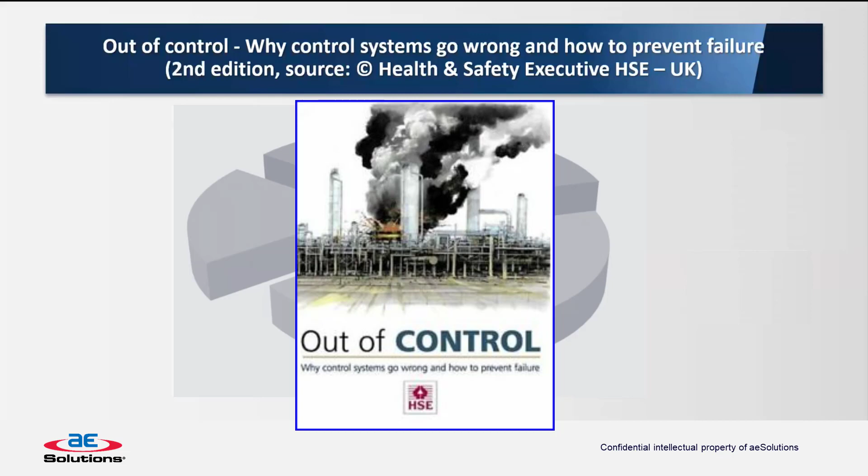Is that really why control systems go wrong? Okay. Out of Control: Why Control Systems Go Wrong and How to Prevent Failure. That's a publication of the United Kingdom's Health and Safety Executive. It is very well known in the functional safety business. And I have used this chart in multiple presentations over the years.

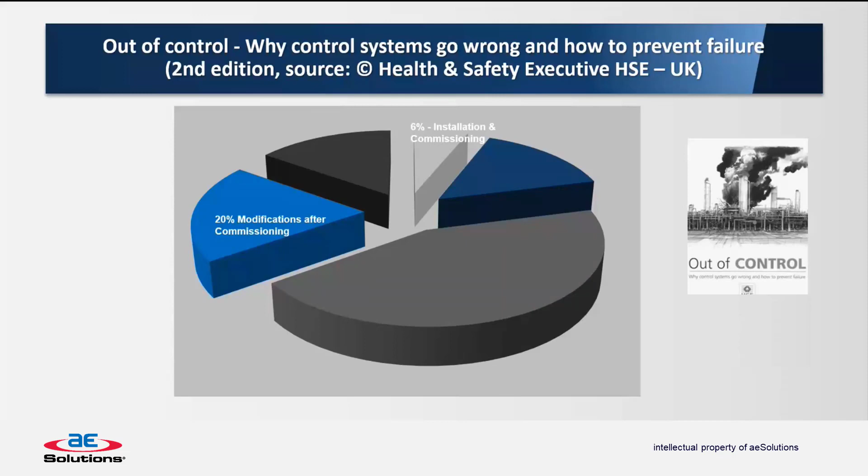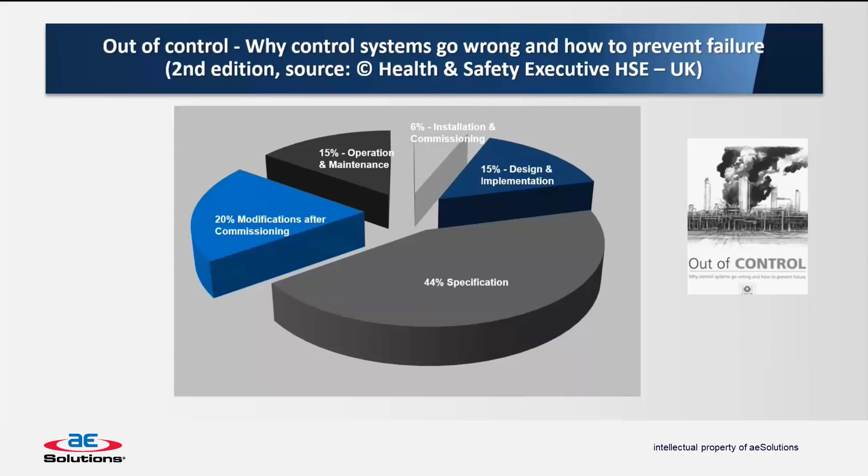And what it represents is the percent of a particular phase of the life cycle where things went wrong that resulted eventually in a serious incident. 6% installation and commissioning, 20% modifications after commissioning, 15% operation and maintenance, 15% design and implementation, and this is the biggie that was a surprise to a lot of people when it was published, that where we were going wrong with process safety and related to instrumented protective functions was in specification.

So if you take that pie chart, you can do the same thing against the safety life cycle: specification, design and implementation, and then you can break it down a little bit more to show the areas that we're interested in: hazard and risk analyses, then SIF selection, safety instrumented function, and safety integrity level determination. The SISFEL is what we used to and still do call the group that I am in. And then device selection, safety integrity level calculation. Again, that's a SISFEL function.

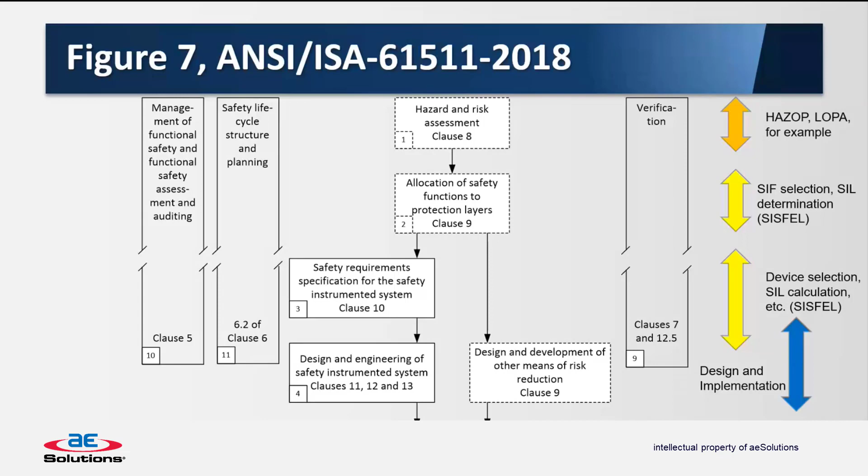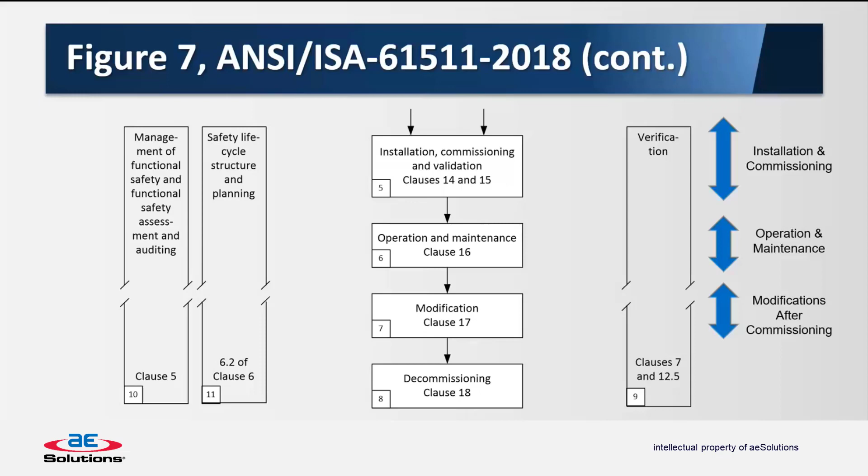And then, not to cut off half the life cycle, installation and commissioning, operation and maintenance, modification. I think if you had taken a survey of people before the HSE publication came out, this is where people would have said most of the incidents were caused. And I'll have a little bit more to say about that later in the talk.

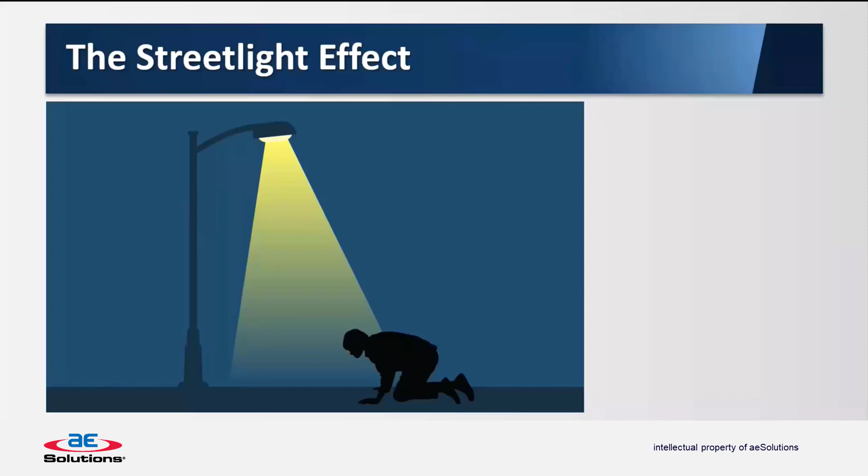What really prompted me to want to do some of the research that led to this talk was what is known as the Streetlight Effect. You may be familiar with this little story of someone on their hands and knees, obviously looking for something. Along comes a police officer, asks the person what they are doing. And they say they're looking for the car keys that they dropped. Well, the officer wants to help, so he asks, where were you standing exactly when you dropped them? And the person replies, back up the street. Then why are you looking here? Because the light is better.

Are we looking at the specification, not to the exclusion, but giving it more effort than we should? Because that's our business. That's what's right in, at least, my part of the business. What's right in front of me on my desk or on my computer screen is the SISFEL portions of the safety life cycle that I just identified. So that's the Streetlight Effect.

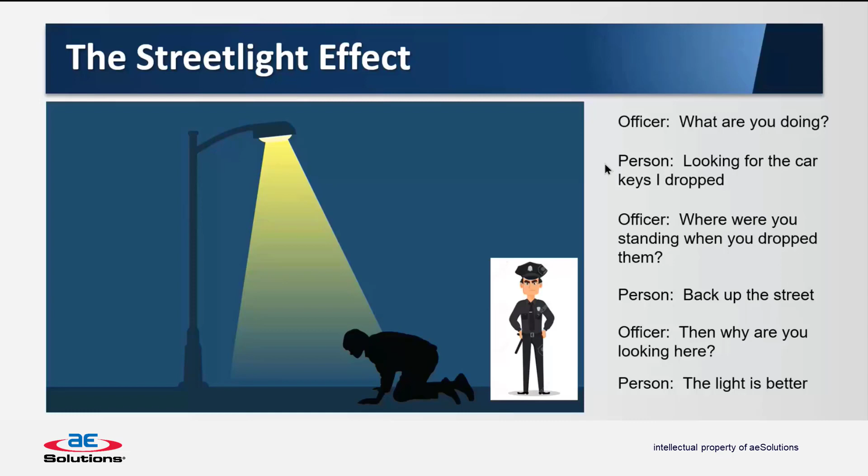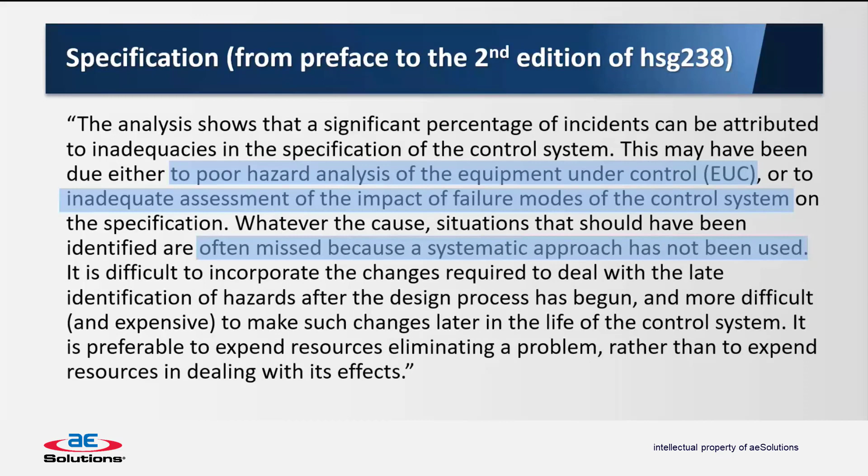When I was putting this talk together, I said, well, I'm familiar with the identification of the different incidents in the report, where they identified that specification is where they went wrong. But I said, well, I probably ought to go ahead and really read the report. And if I read the report, it is not as exclusive to the analysis of the various phases as I was assuming. They do say poor hazard analysis of the equipment under control, inadequate assessment, systematic approach not used. These are all portions of the specification phase that when you lump everything together as specification, that's where I started to get worried if we were looking where the light was better.

So this is the table from that report, where 44% of the incidents they reviewed were due to inadequate specification. And they said of those, 12% were inadequate functional requirement specification, and 32% were inadequate safety integrity requirement specification.

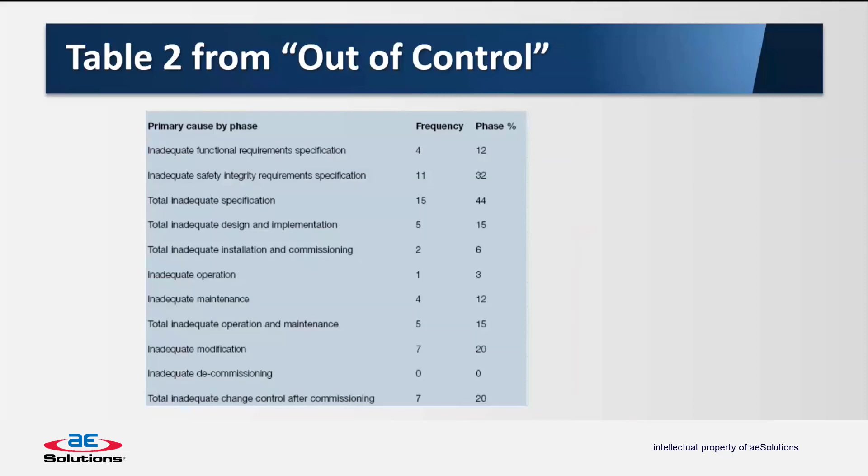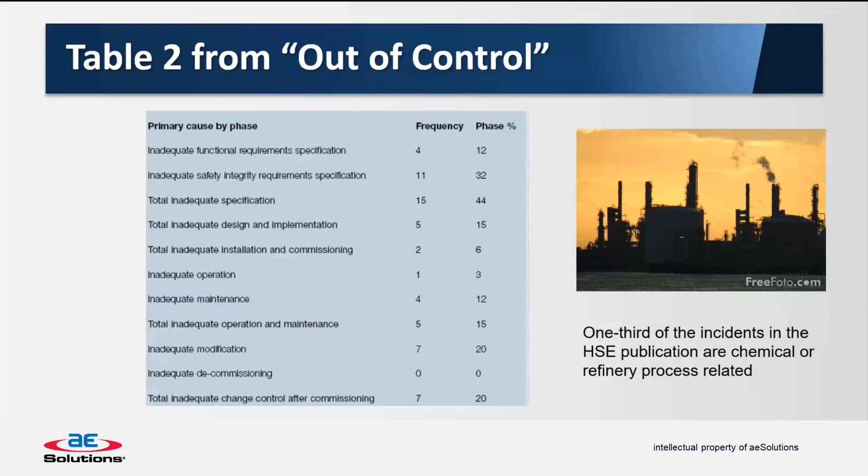But the granularity of the causes in these compilations is somewhat limited. In other words, just because a significant incident happened, very few cases do the reports, particularly the summary reports that you can find on multiple incidents, rarely do they give you the detail that you would need to say, was this specification related or not?

Most of the major incidents involve a sequence of events. They have multiple causes related to organizations and other things. And they generate these large reports. And again, you may find something that says, well, specification of this control or safety function was inadequate. That's almost never the entire story.

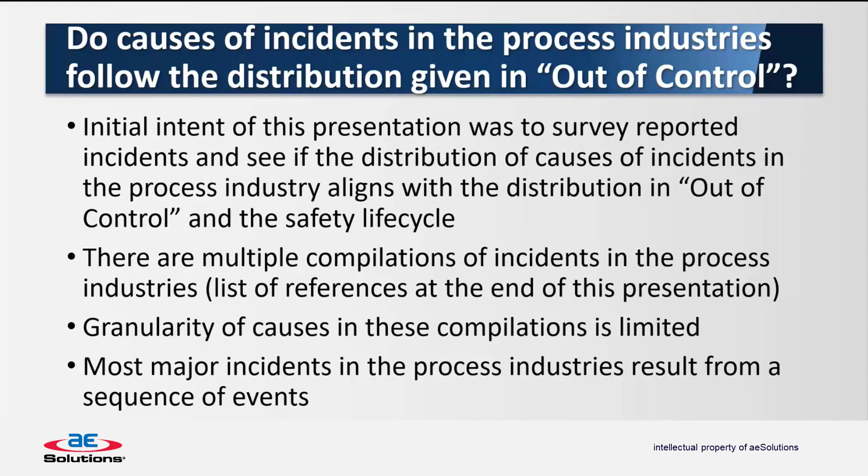So I did go through several of the reference lists, and I did look at 50 incidents in a particular period of time out of Loss Prevention in the Process Industries, which is a commonly cited book. And I was only able to identify 5 that were in the least bit instrument related based on the description that was given. And again, can you say from this, were these specification related? Possibly. There's just not enough detail to tell.

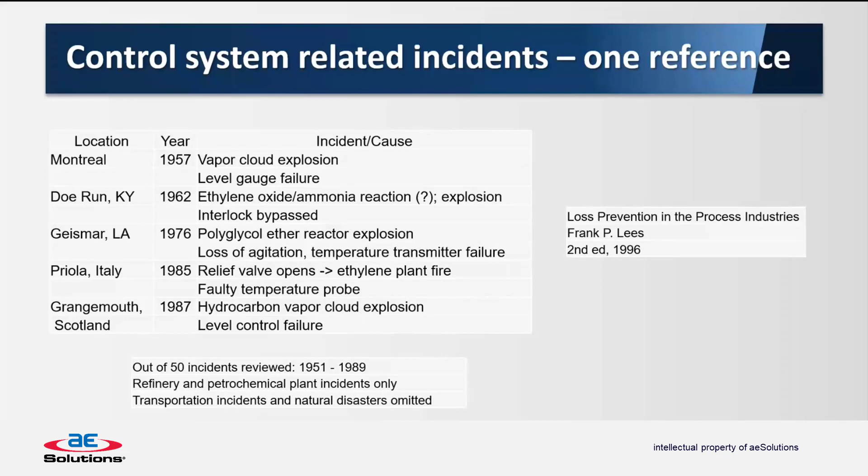Essentially it was a tank overflowed in a fuel depot outside of London and generated a vapor cloud that eventually exploded. And reading the reports on the incident, if this was the consequence, did they not recognize the potential consequence of overfilling a tank? Would it not have made sense to have multiple independent, diverse technology level instruments and communication to the remote control center? So I would have to say, of the major incidents that most people are familiar with, Buncefield becomes the closest to being specification related.

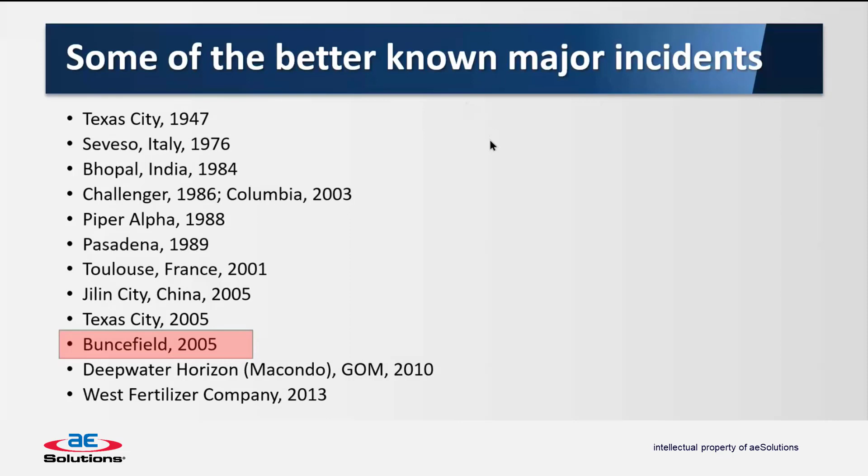So where can things go wrong in specifications? Well, obviously in the hazard assessment: if you don't identify a hazard, if you don't identify an initiating event, if you don't accurately predict the potential consequence, if you give too much credit for your existing safeguards, then you have missed something that will not be addressed in the rest of your project.

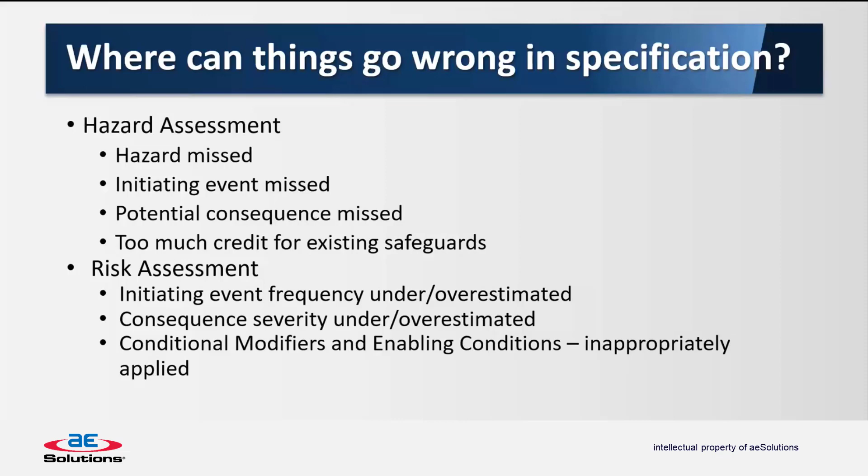Risk assessment: people tend to overestimate or underestimate initiating event frequency. We happen to be involved in a project right now where we're actually doing some failure mode and effect analysis, trying to apply some Bayesian statistics to help a client identify an initiating event frequency closer to the true value than what you can get just out of looking at the reference books. Obviously, you can underestimate the consequence severity. Conditional modifiers and enabling conditions can be inappropriately applied to reduce the potential frequency.

I borrowed this chart from the presentation I did a while back on functional safety assessments. It's not really a serious analysis, but one thing we run into frequently when people ask us to help them do safety integrity level determination of safety functions related to fired equipment is that they start out assuming that if the slightest bit of uncombusted fuel makes its way into the firebox, then you have a violent explosion that results in a fatality. And that makes an awful lot of assumptions.

So this just happens to be a specific instance that I've seen several times, and people come up with what seem unnecessarily high safety integrity level requirements beyond that required by the standards to address this, when if they took a more hard-headed look at it, it would not necessarily occur with the frequency or the consequence that they assume.

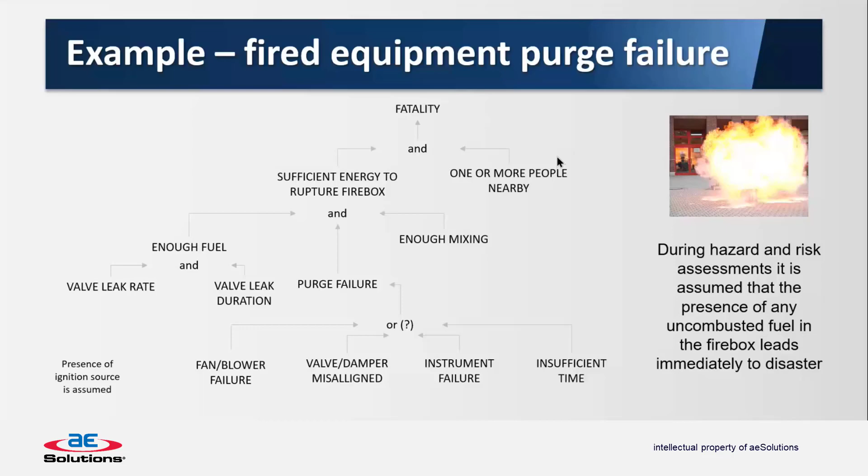In the safety requirements specification, systematic errors. Are your field devices going to be certified to IEC 61508 or based on prior use? The standard is more forgiving of you if you base them on prior use. However, this is also some place where you can go astray, I should say, because the latest version of ANSI ISA 61511 allows you to have a safety integrity level 2 function with 0 hardware fault tolerance. In other words, no redundancy.

Well, that is based on the fact that the failure rates you're using to calculate the safety integrity level are based on prior use, but the standard doesn't state that very clearly. And that's an unfortunate weakness, I think, in the standard, but it's a place where you have to be careful. It makes a difference in how you evaluate hardware fault tolerance, architectural constraints, whether you're basing your failure rates: are they certified devices, or are they based on prior use?

Is your failure rate data reasonable? Boy, that's something that we deal with very frequently. Clients will come to us sometimes with a manufacturer's certificate that has a dangerous undetected failure rate for a device that's 1 or 2 orders of magnitude lower than what we're used to seeing even for certified devices. And sometimes it can be difficult to get the client to recognize the risk that they're taking.

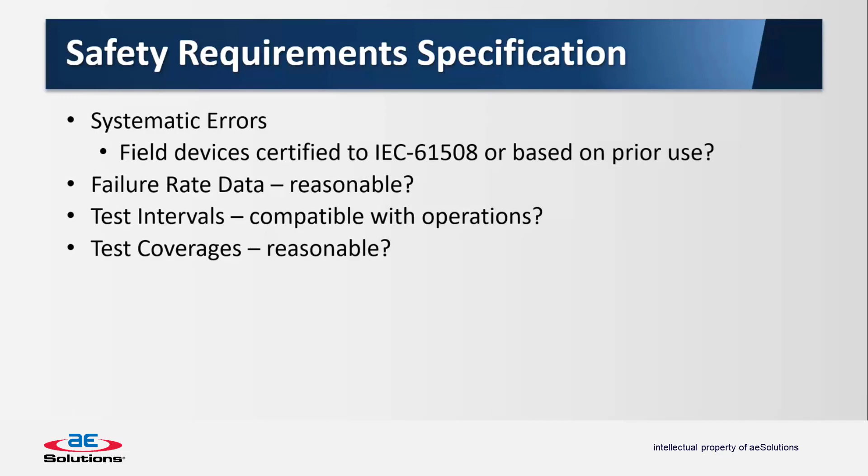Test coverages, that's another place where people want to say, oh, our test coverage, we cover 99% of the potential failures. Well, if you look at hopefully the manufacturer's safety manual, that's possibly not reasonable. We had a good presentation some time ago by a vendor talking about the work that has been done in the nuclear industry about what it takes to obtain proof test coverage for shutoff valves. To get to the highest proof test coverage takes an awful lot of work and an awful lot of resources, hardware resources.

Process safety time, is it accurate? Is it considered in the design? Do the valves really close fast enough? All process operating modes considered. Do you consider startup and shutdown? Are there times when one piece of equipment is out of service but not another? Will tripping this safety function at that time create a hazard you hadn't anticipated?

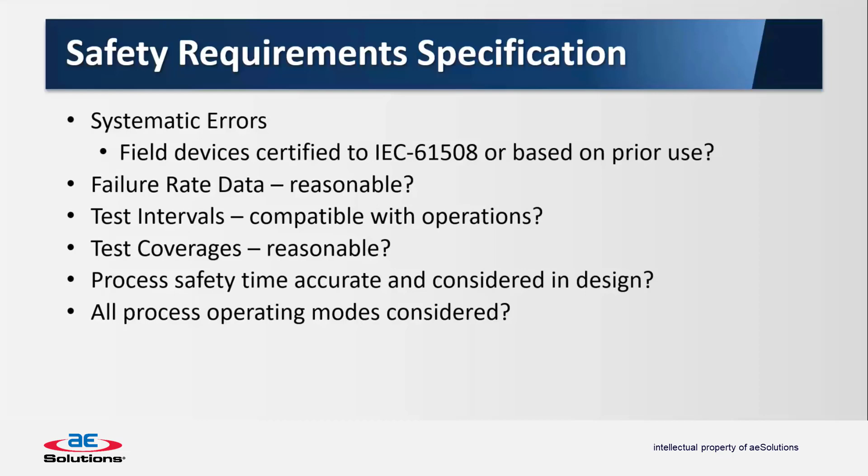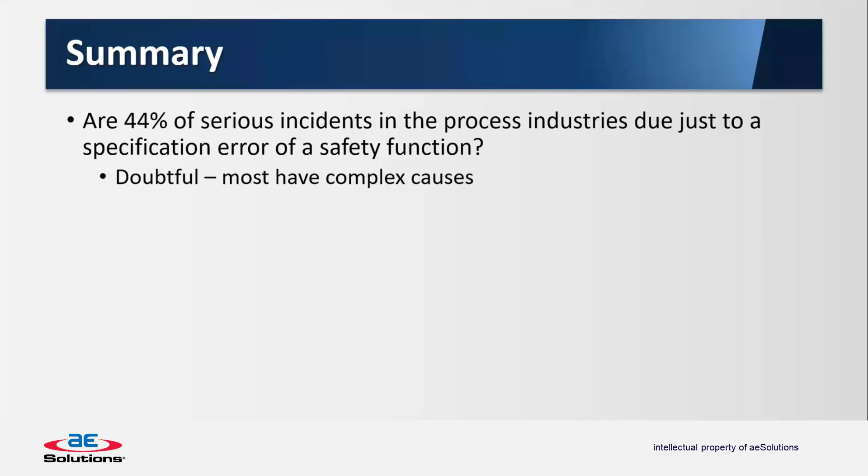So in summary, are 44% of serious incidents in the process industries due just to a specification error of a safety function? Doubtful. Most have complex causes. Notice I'm saying serious incidents. Out of Control focused attention on the specification portion of the safety life cycle, and that was a good thing. Because before that, I think most people would have said that operation and maintenance and problems with management of change were where the main causes of serious incidents were happening.

And one reason for that is, well, things don't blow up during the specification stage. They have to be operating and being maintained before you have a serious incident. And so that tends to be where the focus is. That doesn't mean that the chain that led to the incident did not start back in the specification phase. So Out of Control, I still consider it a valuable reference.